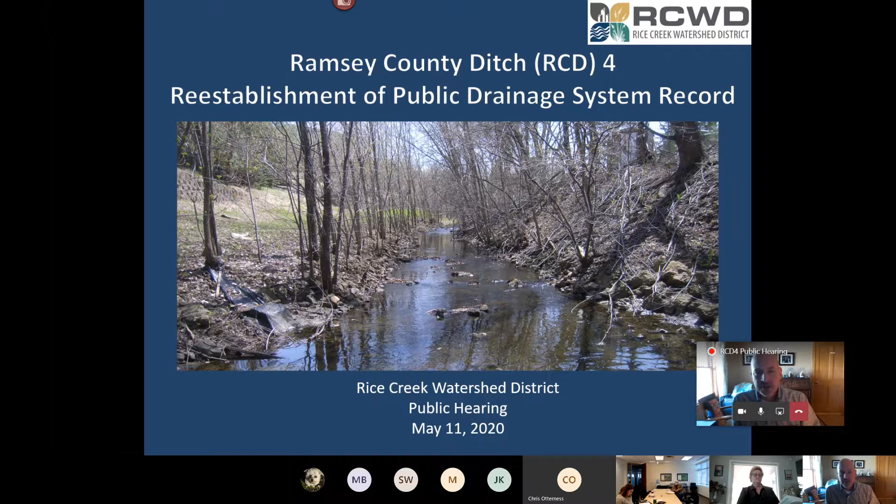The presentation's purpose here is to describe what the district is doing. President Preiner had a couple of points, noting that for Ramsey County Ditch 4, we're trying to define the alignment, cross-section profile, hydraulic structure locations, materials, dimensions, elevations, and the right-of-way of this specific ditch system. We'll explain why the district is doing that, why it's important to define and describe what is known as the as-constructed and subsequently improved condition, which goes by the acronym ACSIC. That simply reflects what the records and the subsequent board decision is as to the system and what makes it up. We'd like to be clear to all parties about the process we're going through, and also to define what public information is pertinent to the public hearing itself.

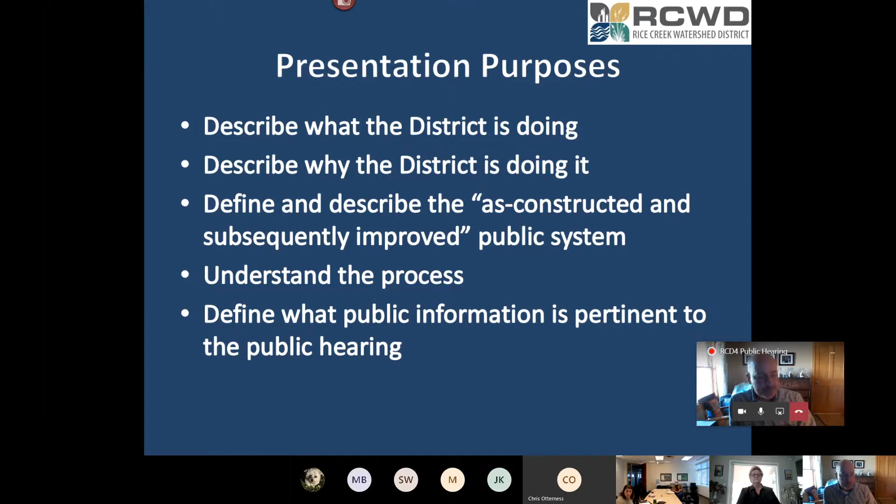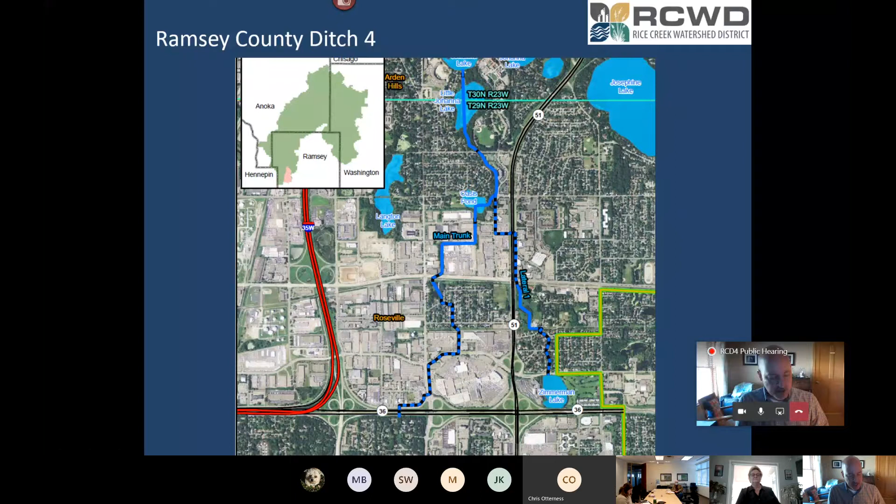Now on the screen, we're showing the system itself. On the north end is Lake Johanna. I'll note that the system drains north, which can be a bit odd, but it does drain in the northerly direction. The southern half of the system is primarily in a storm sewer or piped condition. It then splits into two legs, if you will: a western one, which is the main trunk, a piped system that goes through the mall there, Rosedale Mall, heads north where it becomes open ditch, and proceeds up to Oasis Pond. The eastern leg is known as Lateral 1. It is also primarily a piped storm sewer system, with an intervening open section where it traverses a wetland area. They join up, continue downstream, again flowing north, go through Little Johanna Lake, and then terminate at Johanna.

We'll turn this over to John Kolb. He can speak to the legal standard for us, please.

Madam President, members of the board, members of the public present, the legal standard for the hearing is based in statute. It says that after investigation of a drainage system record, the Drainage Authority, if it finds that the records are lost, destroyed, or otherwise incomplete, it may order the reestablishment of records. This particular proceeding dates back to an instruction given to your engineer in 2017 to look at the drainage system and its records and make a recommendation as to the completeness of those records. That culminated in a report dated January 15th, 2018 that the board considered, and based on that, the board asked for additional information, which came to the board on September 4th of 2019.

On September 11th, 2019, the board adopted resolution 2019-25, initiating the records reestablishment process. Your legal standard for decision today is whether the evidence reviewed and presented by the engineer in the engineer's report and recommendation, updated as of November 7th, 2019, reflects a weight of evidence that would describe the most likely as-constructed and subsequently improved condition of the ditch, including all specific items reviewed both by President Preiner and by Mr. Tomczyk. You had an informational meeting on January 30th of this year at the Roseville City Council chambers, which resulted in additional information entered into the record. And now, because of the pandemic, we're having this hearing under unique circumstances, but additional notice was given and additional opportunity to participate was provided for that reason.

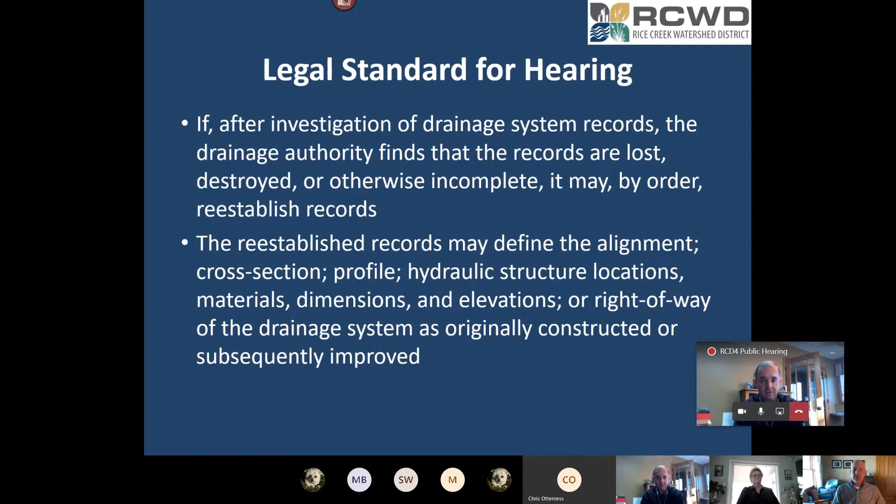That's the extent of the legal basis for initiating these proceedings, and a review of the notices that have been provided. Again, your decision standard is a weight of the evidence standard, based on whether the evidence reviewed and presented by the engineer points to the engineer's recommendation as the most likely as-constructed condition of the system.

Subject to your questions, I'll be followed by the engineer. Any questions for John Kolb? Okay, we'll go to Chris.

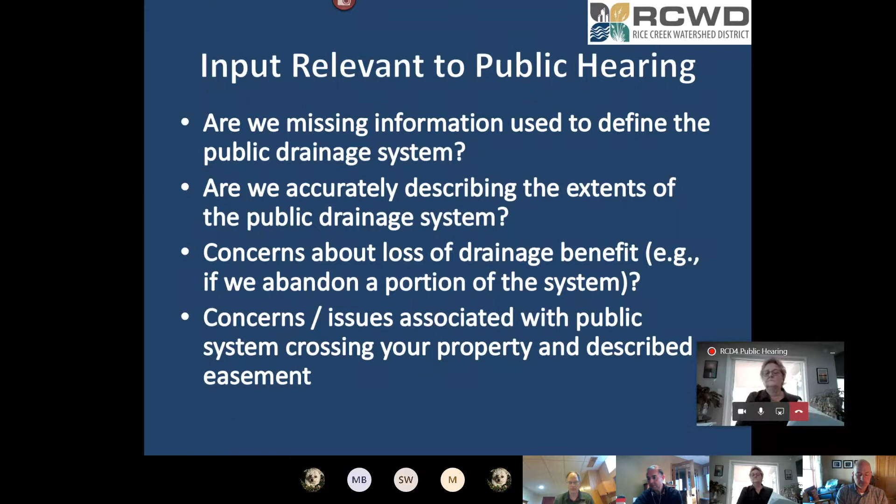I'll begin talking about the input relevant to the public hearing, which Manager Preiner already touched on in her opening statement. Some pertinent items include: is there missing information to define the public drainage system? Within the report, are we accurately describing the extents of the public drainage system? Is there concern about potential loss of drainage benefit, for instance if the district were to abandon a portion of the system, and concerns or other issues associated with the public drainage system crossing your property as described by easement. Again, these are issues related to the existence of the system, not necessarily its current condition or as-constructed condition.

Chris? Yeah, go ahead, I'm sorry to interrupt. I think we heard a click on the phone, President Preiner. It might be good to identify if anyone else is present. Ashley, can you tell me if anybody else is on besides Jennifer on the phone line? Is anybody else calling in? Jennifer, are you still there? Yes, I am, yep, I'm here. Okay, then we'll proceed. Thank you.

Go ahead, Chris. Sure, so I'll speak a little bit about the role of the Rice Creek Watershed District with respect to this drainage system. The district is the drainage authority inside its boundary for each of the public drainage systems established under 103E and statutes preceding it. It should be noted that the drainage system is owned by the landowners, not by the district. The district instead administers the system on behalf of those landowners.

The people that own the drainage system, those landowners, are the ones who paid for it originally or were assessed for its construction. As such, those lands do have a right to drain water to the ditch, within reason. There are some limits to that, and some are statutory.

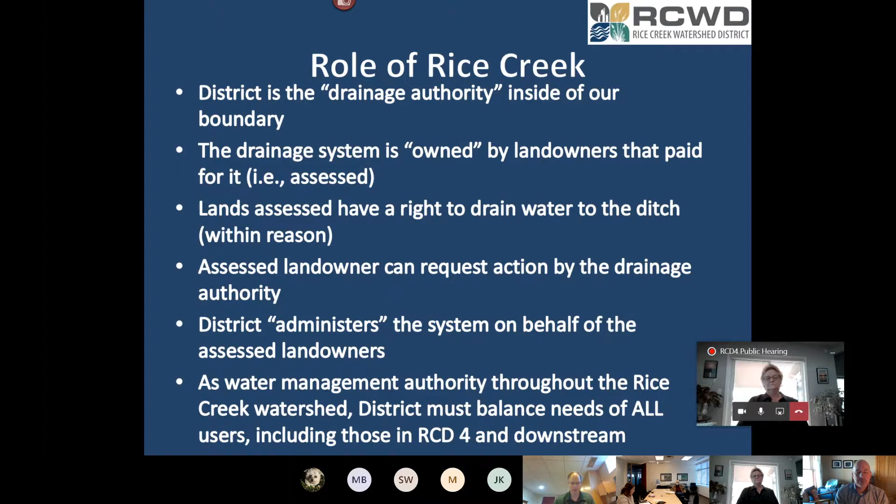The purpose of this review along the system is to reestablish the drainage records, as many records for the system have gone missing. Most notably, documents for the establishment of the system from 100 years ago are either no longer in existence or no longer available. So we needed to do investigative work to determine the alignment, profile, cross-section, and right-of-way of the drainage system. As Nick alluded to earlier, that's referred to as the as-constructed and subsequently improved condition. That condition serves as the baseline for future maintenance, and for determining what a repair is on the system and other potential modifications, petitioned or otherwise.

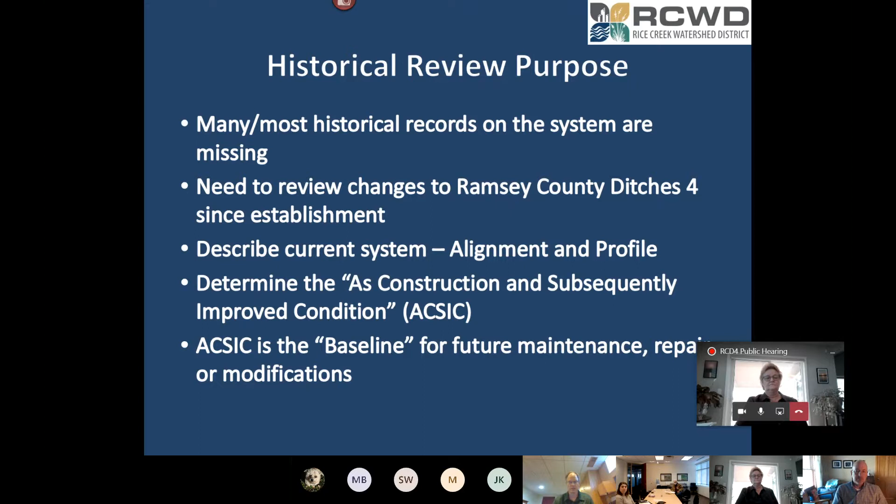The RCD4, Ramsey County Ditch 4 system, was established in 1908 by Ramsey County. As Nick alluded to earlier and showed on the map, it has a main trunk and one lateral, approximately 1.9 miles of open channel and 2.2 miles of storm sewer. Jurisdiction for this drainage system was conveyed to the Rice Creek Watershed District in 1974.

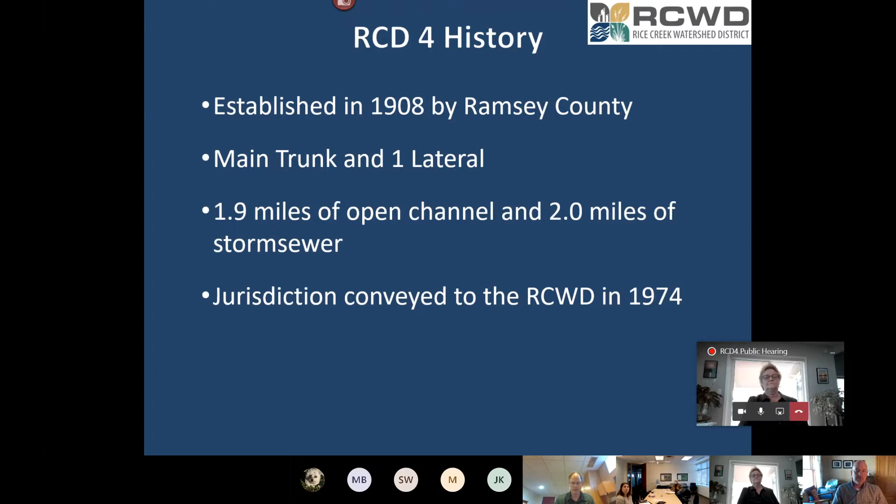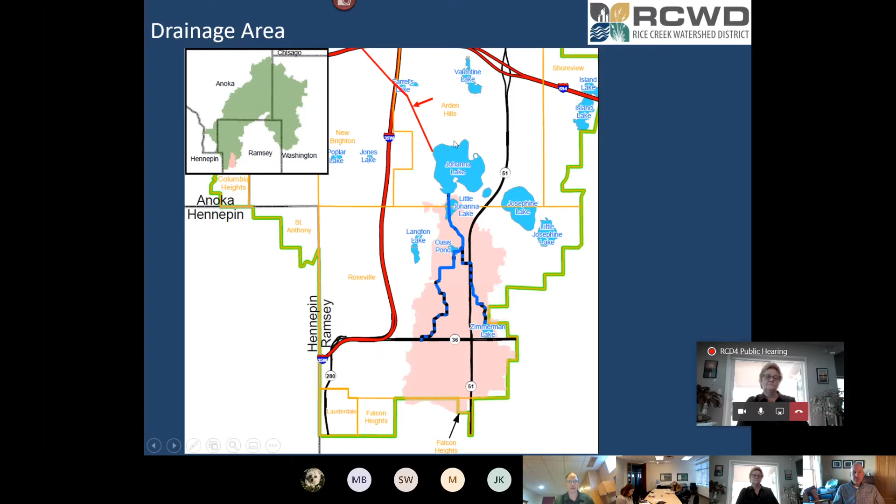One thing I'll point out on the map is a line shown in red, which is the outlet for Lake Johanna. It's critical to know that this outlet is not part of the public drainage system. When the Ramsey County Ditch 4 system was originally established, the extent of the system ended just upstream or at its outlet into Johanna Lake. That outlet channel from Johanna Lake all the way down to Long Lake is not part of the public drainage system. It's a system managed by several other entities, including landowners located along that ditch. It's what the district has referred to as a trunk conveyance system under its watershed plan, but the district does not have the obligations it has under state statute for its management.

So it's important to know that what we're talking about here today is only those portions shown on the map in blue and a dashed blue and black line. That is the Ramsey County Ditch 4.

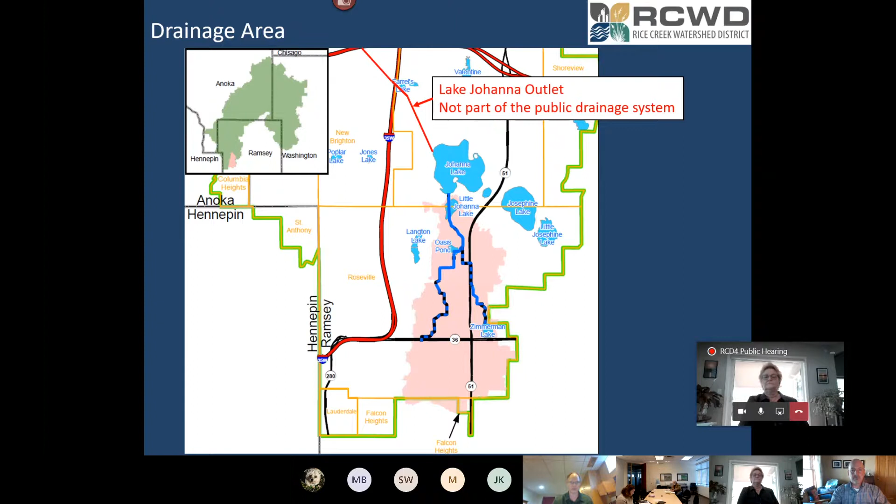This is the same map that Nick had indicated earlier, showing the extent of Ramsey County Ditch 4. Again, the upstream end of the system for the main trunk begins at Highway 36, and the upstream end of lateral 1 begins at the outlet of Zimmerman Lake.

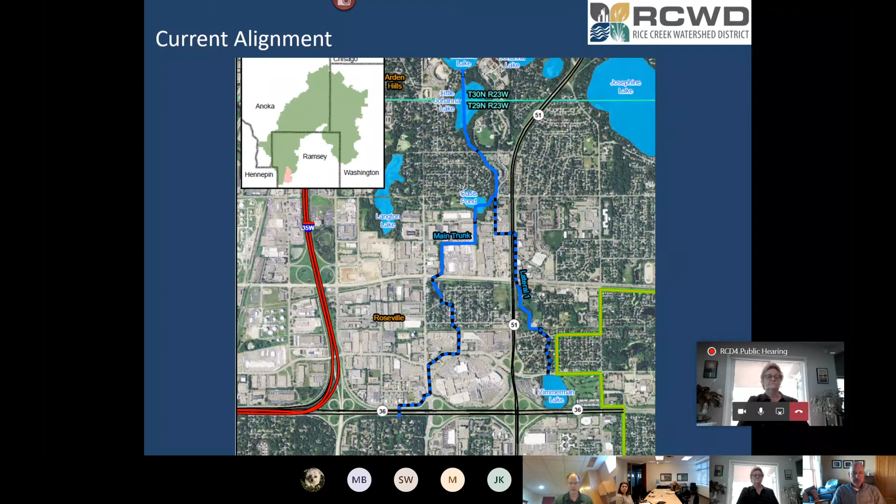As we were going through the historic review process, we again researched a number of different records, and as we came to the conclusion of what the as-constructed and subsequently improved condition was of the system, we developed maps that we have shown here.

These are referred to as plan and profile drawings. The upper part of the drawing shows a bird's eye or plan view of the system, and the lower part shows the system in profile, meaning if you took a cross section along its length, this is what it looks like with elevations.

One thing to note on these maps is that you can see the pipe shown on the map in the lower part of the screen. Above it, there's a dashed line showing the existing surface grade on the system. This is an area with storm sewer. In other areas, that dashed line shows where the bottom of the existing channel currently is.

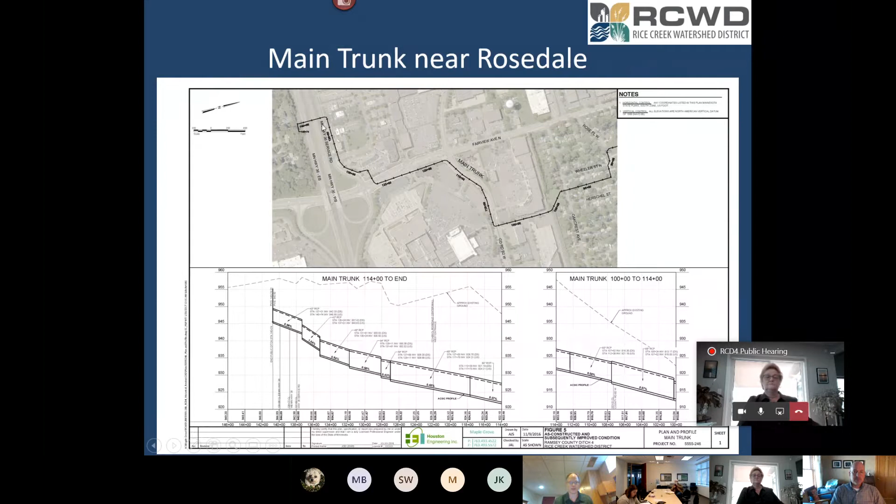The location I'm showing here now is the portion of the main trunk that's the most upstream, near the Rosedale Mall. You can see the system begins with a pipe network on the south side of Highway 36, then crossing Highway 36 and continuing to the north. As we work our way further north...

The drainage system crosses County Road C, where it begins an open channel section that continues past Terrace Drive and into Oasis Pond. At Oasis Pond, there is an impoundment on the system that holds the water levels, and there's also a sediment basin in the pond that the district currently operates as a district facility.

I'll note at this time that there is a substantial amount of sediment currently in the drainage system between Terrace Drive and County Road C, as indicated on the profile part of the drawing.

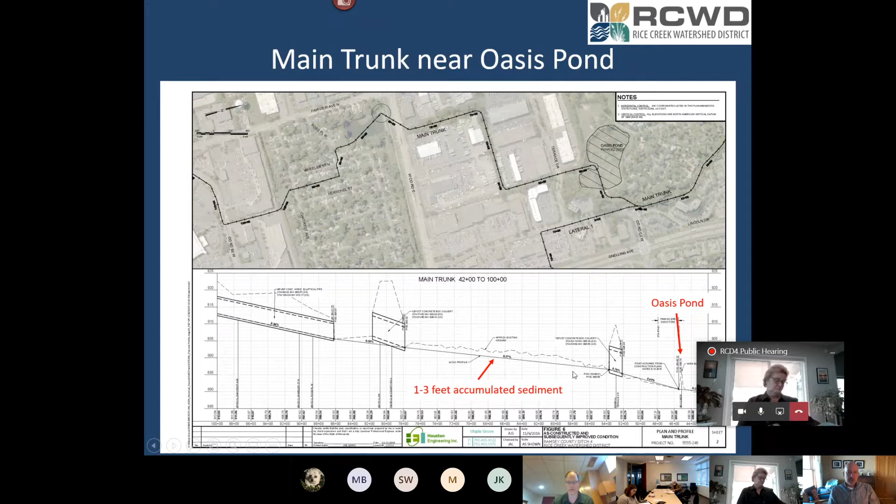Continuing on the main trunk further north, at the outlet from Oasis Pond, it continues through an open channel section that is much steeper than the rest of the drainage system. You can see that in the lower part of the graphic here. Because of the steep slope, it is subject to erosion, and in the past has been grouted with a lot of riprap along this location.

It drains into and through Little Johanna Lake, and then continues on a short stretch of open channel from the outlet of Little Lake Johanna into main Lake Johanna, where the system ends.

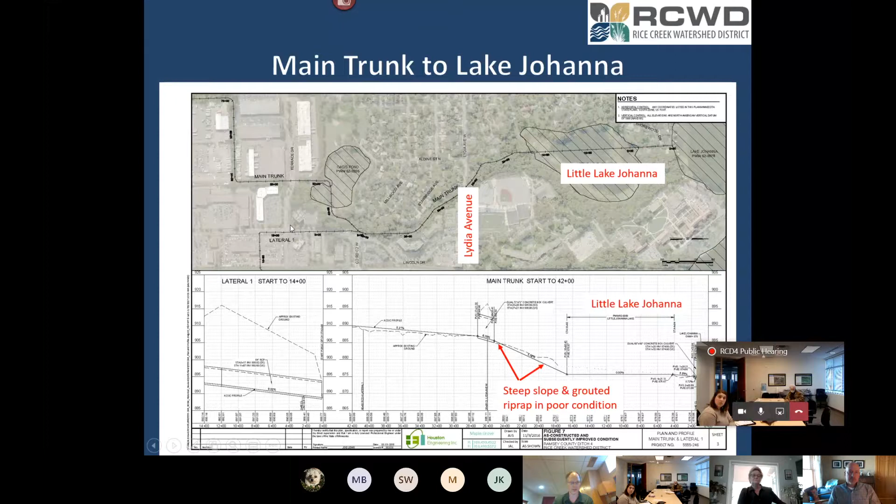One other part of the screen that I'll point out right now is the outlet for lateral 1, also shown on the screen here. If I continue to the next slide, this shows the remainder of lateral 1, which again begins at the outlet of Zimmerman Lake, primarily as open channel.

It goes through a wetland complex, wetland and stormwater pond complex along lateral 1 to the south of County Road C. Then after passing County Road C and paralleling Snelling Avenue as pipe, it crosses over Snelling Avenue through additional pipe and back into the open channel toward the downstream end of Oasis Pond.

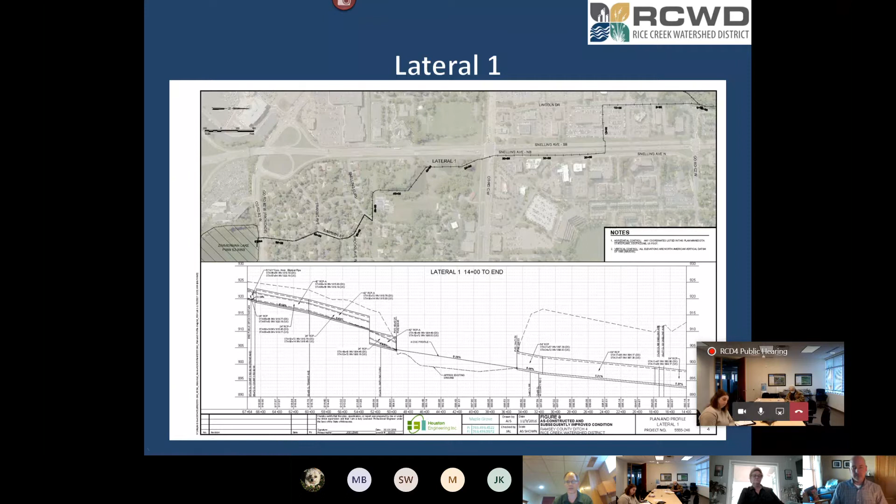So I'll talk a little bit about major modifications to the system over the years. The first is the construction of lateral 1. There's little documentation on its original establishment, but we are assuming it was constructed around the time frame of the rest of the system, in the 1907-1908 time period.

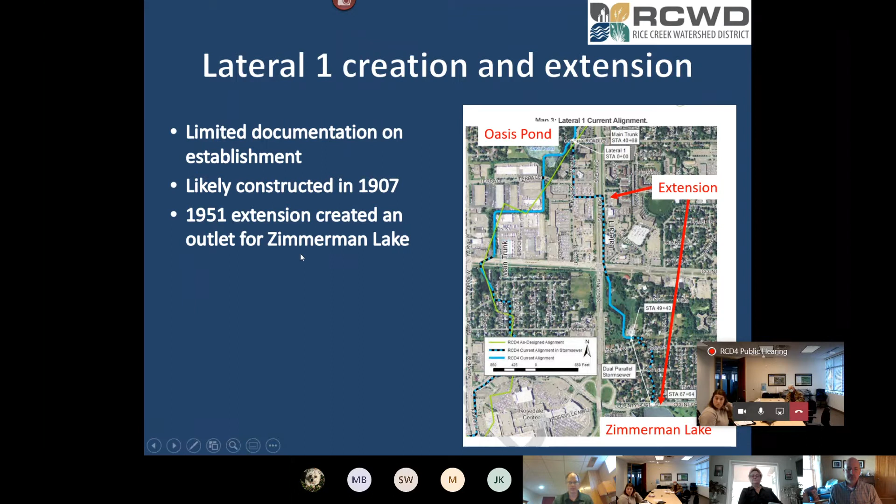In 1951, there was an extension to lateral 1 that created an outlet to Zimmerman Lake. At that time, this extension was completed as essentially an improvement of lateral 1.

The next modification is the realignment of the main trunk between County Road C and toward Terrace Drive. This area shown on the map has a green line, which is the as-designed alignment of the system. As you can see, later on, around 1967, there was an authorized realignment of this part of the drainage system to its current alignment, shown in the blue segment along the main trunk, which now conforms roughly to the property lines located in this segment.

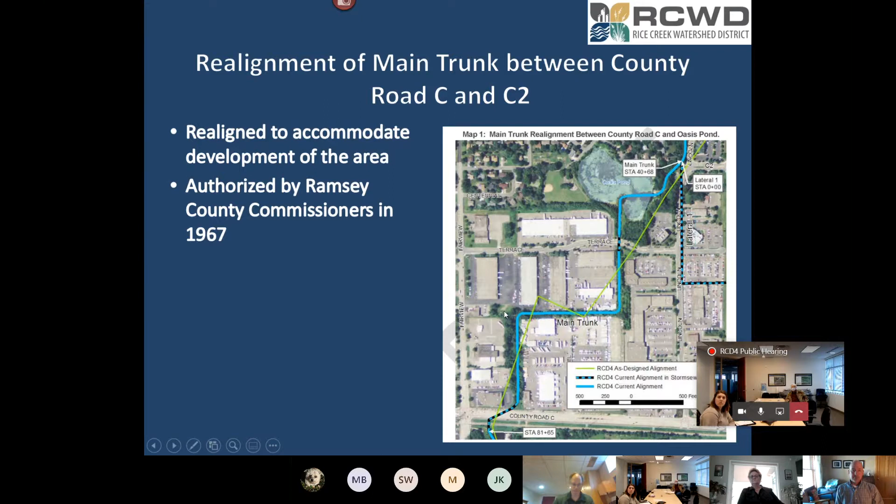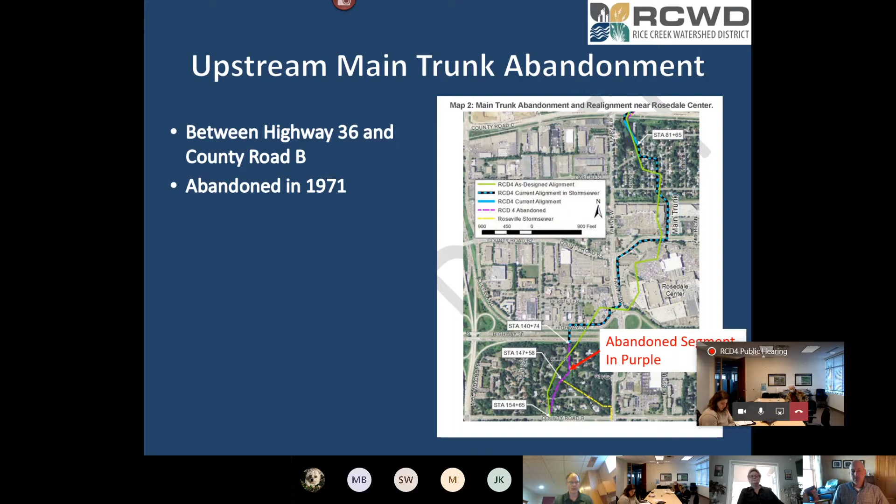Another modification occurred in 1971. Prior to 1971, the system actually extended further south from Highway 36, as shown in the purple line on this map. But in 1971, this portion of the alignment was abandoned between County Road B and Highway 36.

As we're going through our determination of the as-constructed condition of the drainage system, we also determined where the right-of-way of the drainage system is. Functionally, this is the area that the county paid damages for to the landowners when the drainage system was originally constructed, for the disruption of the land along its original construction and for subsequent maintenance that has occurred along the system. The extent of the damages is what we would consider to be the right-of-way of the drainage system. We don't have existing documentation indicating specifically what this footprint was used in paying damages.

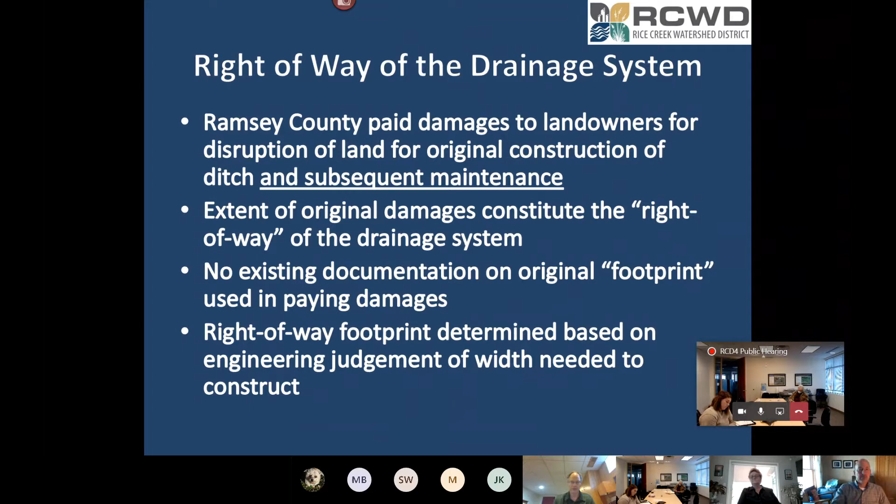However, we are able to, through our forensic engineering judgment, determine what width was needed in order to reasonably construct it back in that time, and also consider the footprint that is reasonably needed in order to continue to have inspection and maintenance along the drainage system. That's what we determined to be the right-of-way.

We determined various widths along the drainage system, as shown in follow-up maps included in our report. We have them color-coded by the amount of right-of-way width needed along the drainage system. This width does vary as you go along the system, depending on how deep it is and whether or not it's enclosed within a pipe. These have been mapped, and we have indicated property ownership along the way that is traversed by the right-of-way of the drainage system.

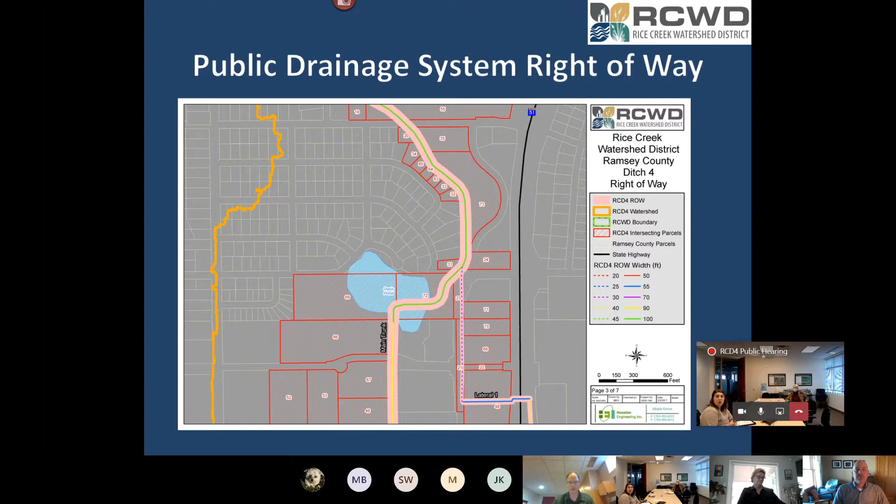Talk just very briefly about the condition of the system. Some other things to note: I had already mentioned earlier that Oasis Pond Outlet was constructed as an impoundment on the system. It was installed roughly in the early 1980s. The district did complete a maintenance project in 2010 to remove some accumulated sediment in that sediment basin and to repair the dam itself.

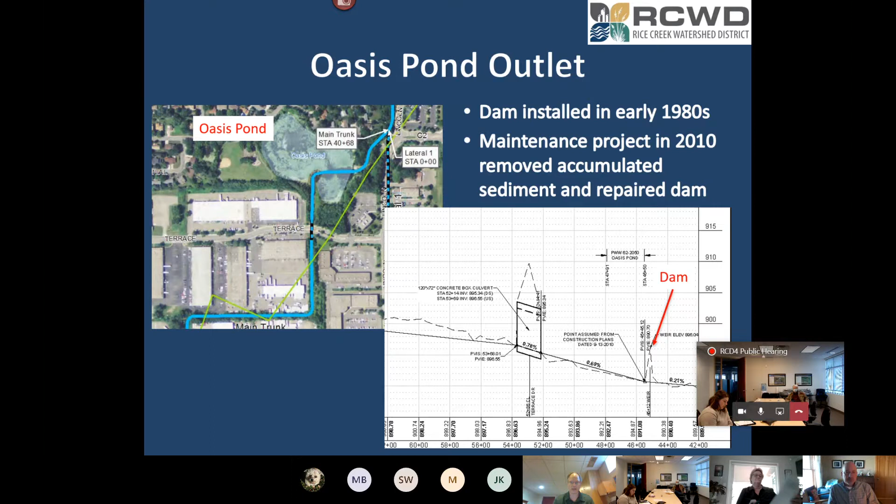Other problem areas we're aware of include the channel I showed earlier, where there was a realignment between County Road C and Terrace Drive. In this section, there's a substantial amount of debris and trash, a lot of sediment that has occurred, and some blowouts that have occurred along this part of the system.

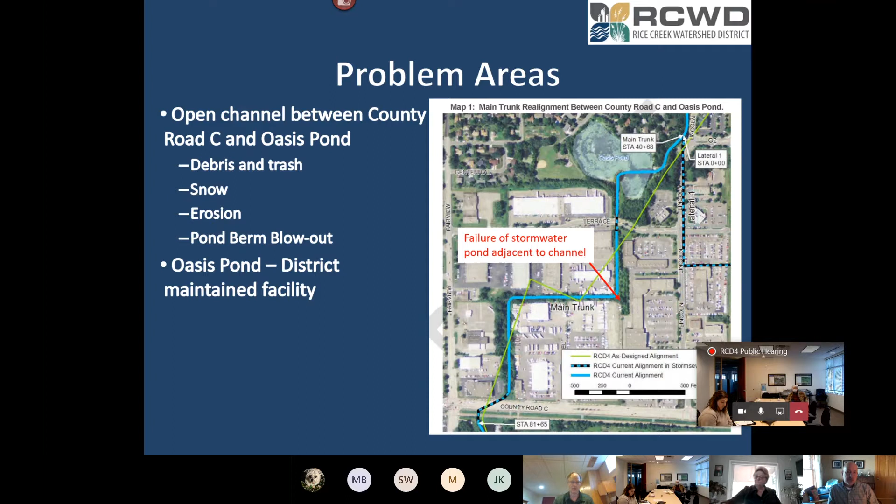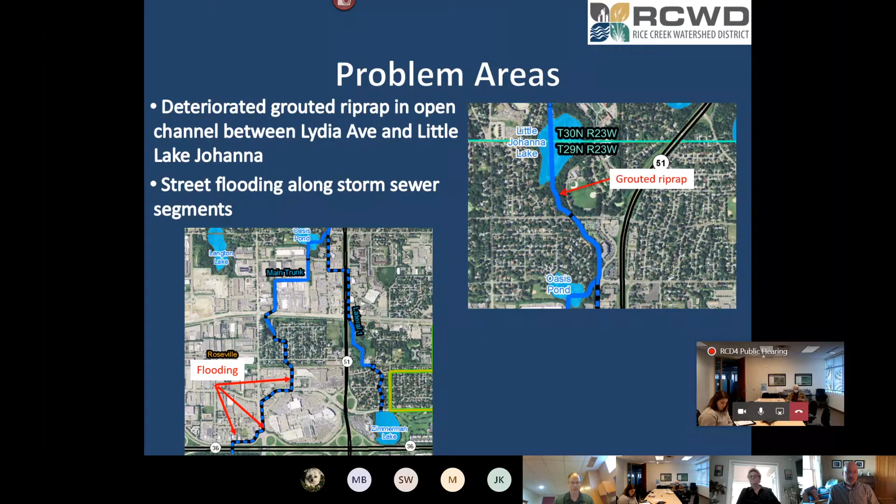Other areas with problematic conditions include a steeper section of the ditch, mentioned earlier, where grouted riprap has been placed. In many locations along this area, the grouted riprap is beginning to fail. We also noted several areas over by the Rosedale Mall area and Fairview Avenue that are subject to street flooding along storm sewer segments. This has been confirmed both with modeling we have completed and firsthand accounts by members of the city.

I'll talk a little bit about long-term management of this system. The Watershed District does inspect and will continue to inspect along the drainage system and address isolated issues. This is part of its required management of the system.

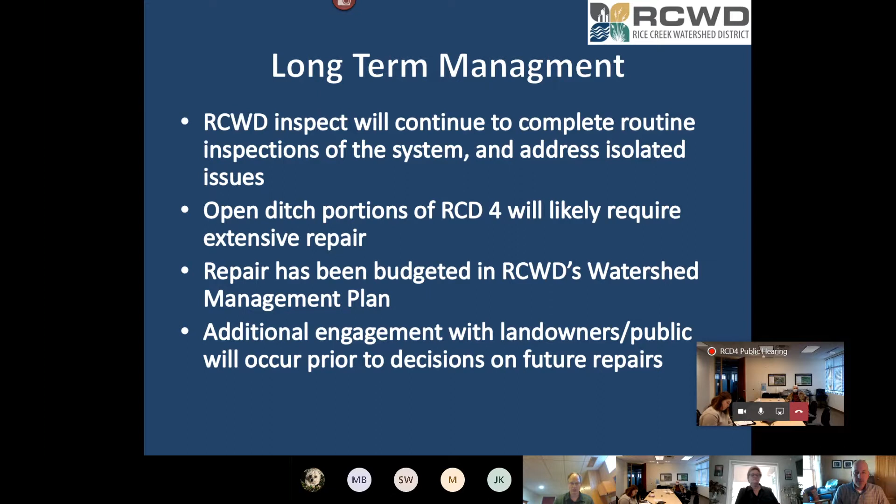There are open channel ditch portions of the system that likely require extensive repair in the future. This repair has been budgeted in the Watershed District's Watershed Management Plan, and we anticipate additional engagement will be needed with landowners and the public prior to any decisions related to future repairs. Again, the purpose of this meeting is not to talk about those repairs, but it seems timely to mention this so that landowners are aware that there will be further engagement as the district moves forward with its management.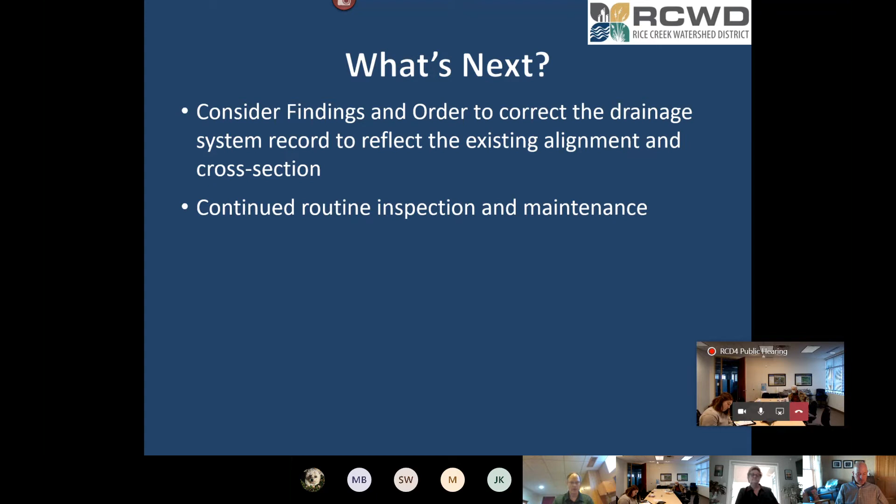Next, we recommend that the board consider findings to correct the drainage system record to reflect the existing alignment and cross-section as identified in our engineer's report dated November 7th, 2019. Again, we recommend continued routine inspection and maintenance along the system. With that, I can address any comments the board may have at this time. Any comments from the board?

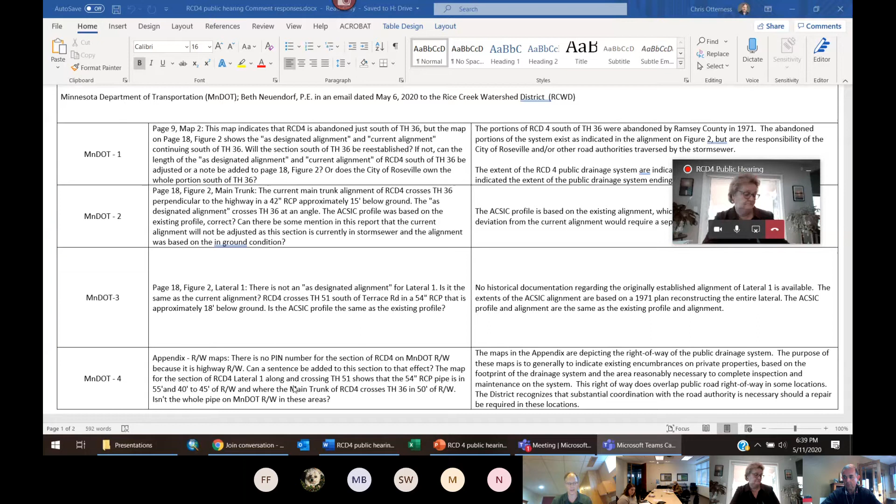The fourth and final comment from MnDOT regards the appendix right-of-way maps. There is no PIN number for the section of RCD4 on MnDOT right-of-way because it is highway right-of-way - can a sentence be added to that effect? The map for the section of RCD4 lateral 1 along and crossing Trunk Highway 51 shows the 54-inch pipe in 55-foot and 40 to 45 feet of right-of-way, and where the main trunk crosses Trunk Highway 36 in 50 feet of right-of-way. Isn't the whole pipe on MnDOT right-of-way in those areas?

Staff's response is that the maps in the appendix depict the right-of-way of the public drainage system. Their purpose is to indicate existing encumbrances on private properties based on the footprint of the drainage system and the area reasonably necessary to complete inspection and maintenance. The right-of-way does overlap the public road right-of-way in some locations, and the district recognizes that substantial coordination with the road authority will be necessary should a repair be required in these locations.

And that's the extent of the comments received - that's the only comments. Noted for the record.

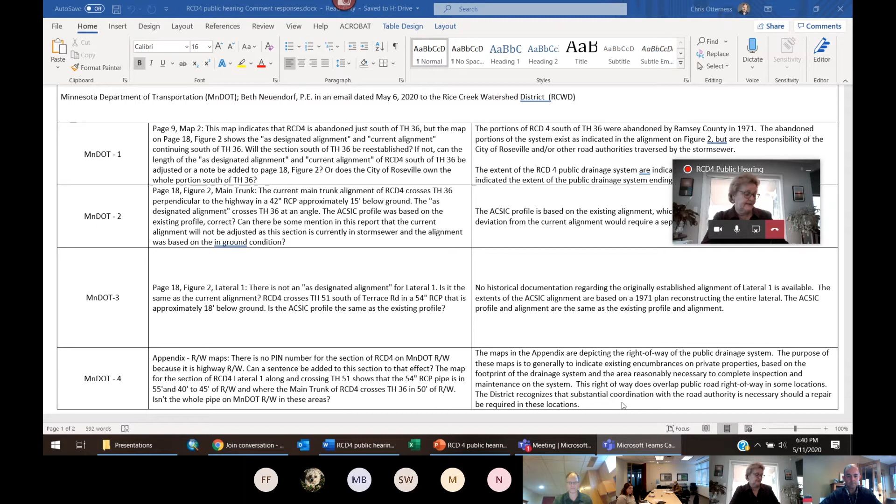At this time, we'll go ahead with listening to members of the public. They're participating remotely, and they were asked to identify themselves before the hearing. However, I believe we had one more person come in.